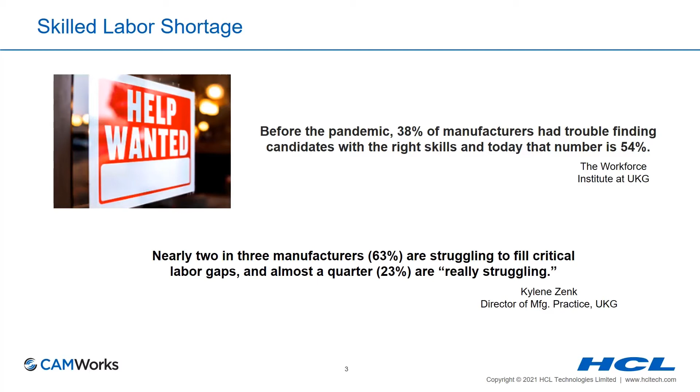For a number of reasons, many related to the pandemic, workers are resistant or at least slow to return to work. So how is this skilled labor gap shortage impacting the manufacturing industry? The short answer is severely.

For example, in the U.S., the economy is recovering and many manufacturing firms are seeing an increase in the number of orders. But due to the shortage in skilled labor, production is still down and companies are struggling to keep up with the increase in demand.

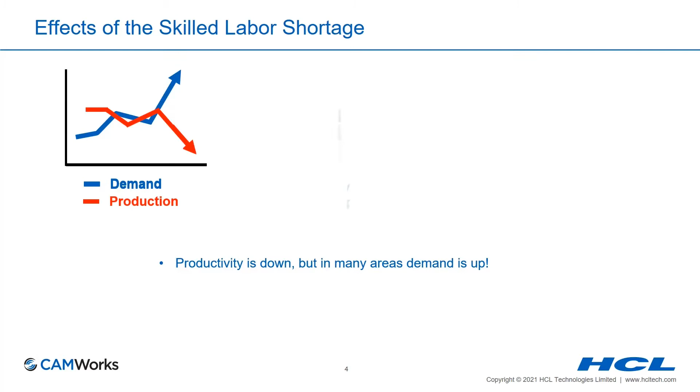In addition, the pandemic and skilled labor shortage has severely impacted the supply chain, and this has affected many manufacturers on both sides of the value stream. On one end, the raw materials and purchased goods manufacturers need to produce products are in short supply, and the supply chain disruptions are causing delays.

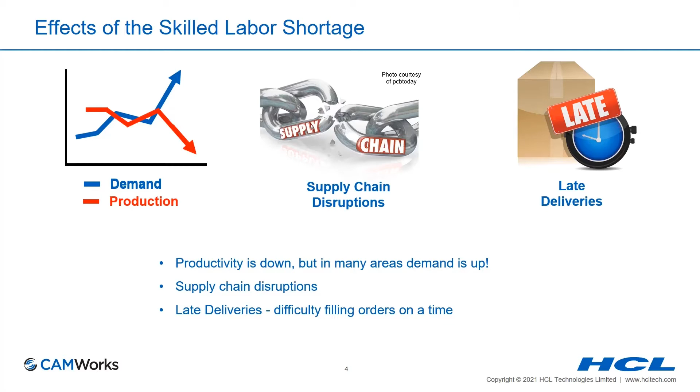While on the other end, if and when they are able to produce the products on time, the supply chain disruptions often still result in late deliveries. To make matters worse, the high demand and limited supply of workers means higher competition for those that are available. For many manufacturing firms, the skilled labor shortage combined with the supply chain disruptions are a double whammy, leaving them between a rock and a hard spot.

So what's the solution? How are manufacturing companies and suppliers coping with the new normal of both a shortage in skilled labor and supply chain disruptions? And why is it that some companies are thriving while many others are struggling?

First, consider the fact that businesses that were well along the road to digital enterprises were able to quickly adjust to working remotely, and as we come out of the pandemic, these companies are faring much better than those using more traditional business models. In short, the pandemic has helped manufacturing companies become keenly aware of the importance of digitally transforming their businesses.

The same can be said for smart manufacturing and Industry 4.0 automation. Manufacturing firms which had gone paperless and were already using smart manufacturing automation tools before the pandemic were in a much better position to minimize the impact on production and pivot to working remotely.

Going forward, it's clear smart manufacturing and Industry 4.0 can help companies to automate the design through manufacturing process, and by using these strategies, manufacturing firms can leverage their existing labor force to combat the shortage of skilled labor.

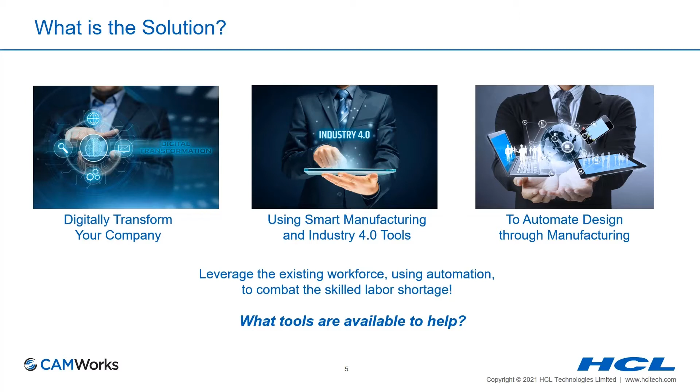So next, let's review some of the tools available to help manufacturers, both small and large, combat the skilled workforce shortage. To begin, fully integrated CAD/CAM is an ideal solution to help fill the skills gap.

When using SOLIDWORKS and CAMWorks, the CAD and CAM model become one and the same, and all of the CAD and CAM data is stored in a single file. There's no need to maintain separate CAD and CAM files, and no risk of machining an obsolete revision of the part. The toolpaths are fully associative to the design model and update automatically to design changes, saving you valuable time each time an engineering design change occurs.

Perhaps most importantly, once CAMWorks has been configured, engineers and designers who are skilled SOLIDWORKS users can also take on some of the CNC programming responsibilities in order to fill the skills gap.

Another automation tool SOLIDWORKS CAM and CAMWorks offers is feature-based machining. Similar to feature-based design using SOLIDWORKS, you can easily create parametric machinable features that are fully associative to the design model. The end result is an 80 to 90% reduction in programming time as opposed to traditional standalone CAM systems.

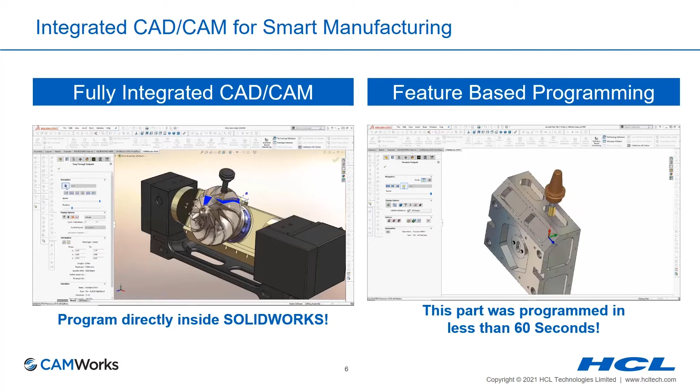All of the CAM data is fully compatible between SOLIDWORKS CAM and CAMWorks. This means engineers and designers currently using SOLIDWORKS already have a robust CAM system at their disposal to assist in creating CNC programs to help fill the skills gap.

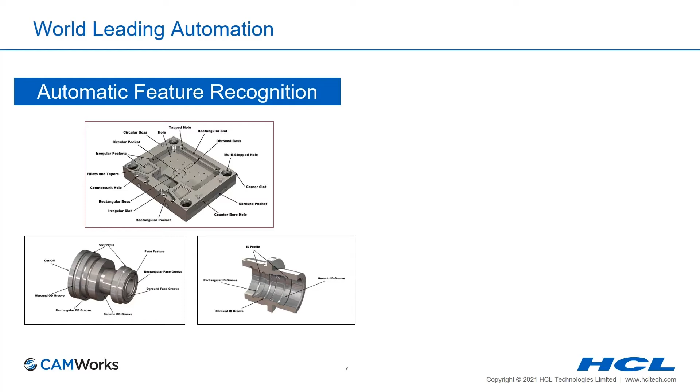From their inception, SOLIDWORKS CAM and CAMWorks included exceptional tools for automation. Using proprietary feature recognition technology, over 20 different types of machinable features can be recognized and added to the feature tree automatically. Another unique automation tool is knowledge-based machining, or KBM.

Using KBM, companies can capture the best practices of their best machinists and programmers into a company-owned database and reuse them automatically. Thanks to KBM, SOLIDWORKS CAM and CAMWorks enables companies to standardize their tooling and processes, create a library of machining strategies, and automate their CNC programming process.

Given the current shortage of skilled labor, these automation tools are more important than ever because they help companies empower their existing labor force to do much more in far less time. Using these smart manufacturing tools, CNC programs that took hours can be generated in minutes and even seconds through automation. And the programs generated are more consistent, promote standardization, and can be optimized to reduce costs and improve quality.

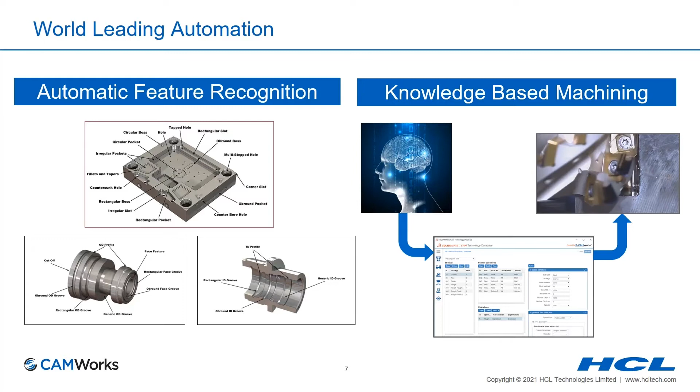To enable the use of digital twins for smart manufacturing and Industry 4.0, HCL developed a technology called tolerance-based machining, or TBM. TBM reads SOLIDWORKS MBD data and automatically selects the correct machining strategies to meet the tolerance and surface finish requirements.

GD&T, ISO 286, and surface finish symbols can all be used to automatically select machining strategies. This cutting-edge technology leverages digital manufacturing to automate the CNC programming process and optimize the machining process.

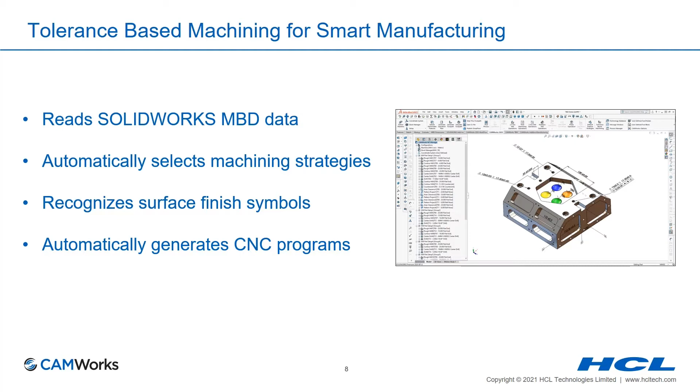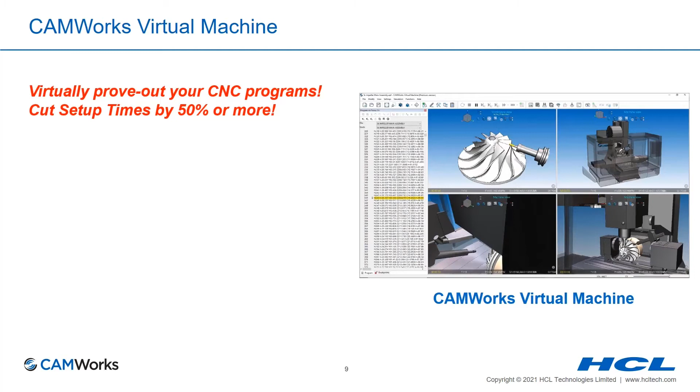Another great tool in our arsenal for combating the skilled worker shortage is CAMWorks Virtual Machine. CAMWorks Virtual Machine leverages true G-code machine simulation to help you virtually prove out your CNC programs and cut setup times by 50% or more.

CAMWorks Virtual Machine includes collision detection for machine components, work-holding devices, and tools to enable companies to avoid costly collisions, broken tools, and reduce downtime.

CAMWorks Virtual Machine is another ideal solution for combating the workforce shortage because it allows companies to prove out CNC programs remotely without using machine time. And shorter setup times, along with shorter cycle times, means shorter lead times and quicker deliveries.

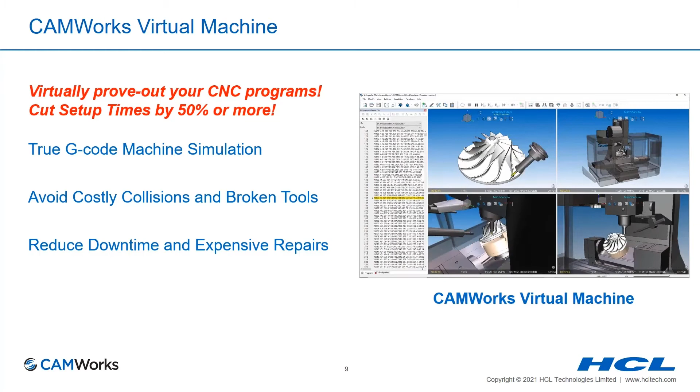Next, let's take a look at some of the smart manufacturing tools we've discussed in action.

Here's a part model designed using SOLIDWORKS. The intent is to machine the part from 6061 aluminum. This part will require 7 setups on a 3-axis CNC machine, or using a 5-axis CNC, this part could be machined in a single setup using indexing or 3+2 machining. Let's use the integrated SOLIDWORKS CAM by CAMWorks to program this part.

I'll begin by extracting the machinable features on the part model. SOLIDWORKS CAM can automatically recognize over 20 different types of machinable features and add them automatically to the feature tree. Here you can see all 7 setups have been created, and the features from each setup have been recognized and automatically placed under each setup in the SOLIDWORKS CAM feature tree.

Next, I'll generate the operation plan, and SOLIDWORKS CAM will automatically generate all of the operations required to machine the features using knowledge-based machining. All of the operations are now created and have been added to the SOLIDWORKS CAM operations tree. Next, we can generate the toolpaths for the operations, and all of the toolpaths are created automatically.

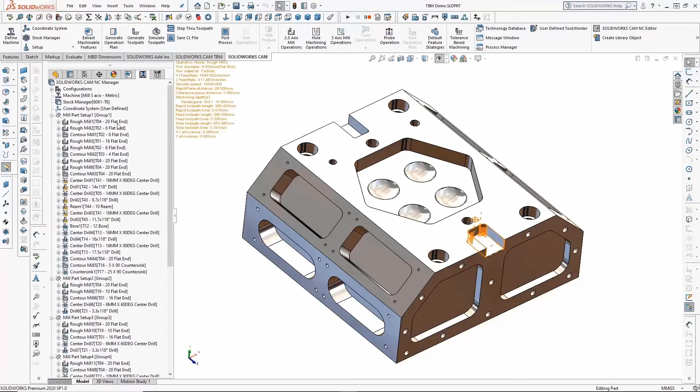Each operation can be opened and reviewed. Any desired changes can be made to the operation parameters and saved back to the database, so the next time the operation is generated, it will include any desired changes.

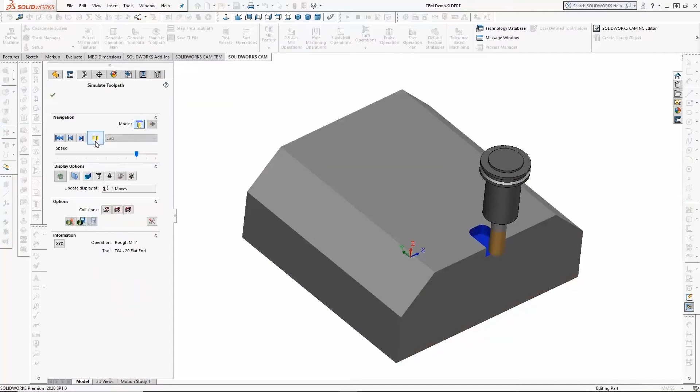Now that all the features and operations have been generated, we can use Toolpath Simulation to simulate the machining of the part. SOLIDWORKS CAM Simulation displays each of the operations that will occur on the CNC machine in the order listed on the operations tree and performs collision detection on the tool, tool holder, and stock.

Once the simulation is complete, I can use the Compare feature to compare the machined model to the design model for accuracy. I can see the part has been completely machined except for the surfaces in the center of the part, which will be programmed automatically later using tolerance-based machining.

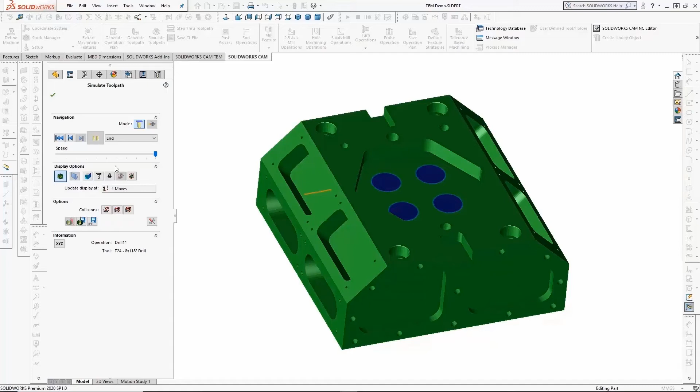Now that the part has been programmed, I can post-process the data and generate the G-code program required to machine the part on the CNC machine. I'll give the file a name and then generate the G-code for machining. Here you can see the G-code program being post-processed.

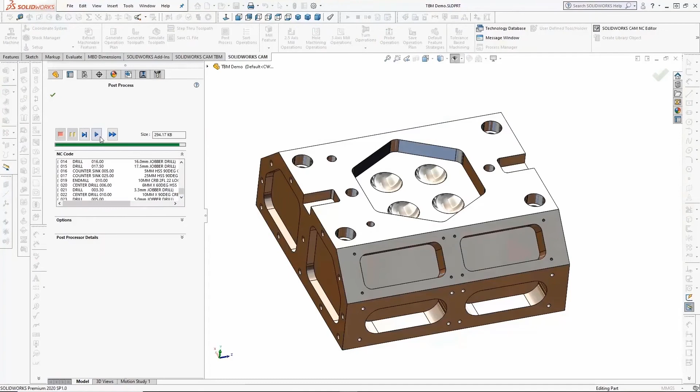Next, let's take a look at the tolerance-based machining, or TBM automation, included in every seat of SOLIDWORKS CAM. We'll begin by setting a tolerance range from 0 to 0.1 millimeters for hole features and select a precision machining strategy for the MBD tolerance range.

Using TBM, users can define multiple tolerance ranges for different types of features and select the machining strategies required to meet the tolerances specified by the MBD data.

On the Surface Finish tab, we can assign a color to each surface finish range, and the color will be assigned to each surface that falls within the specific range. We can also assign the correct machining strategy to meet the surface finish requirements when TBM recognizes each surface finish symbol.

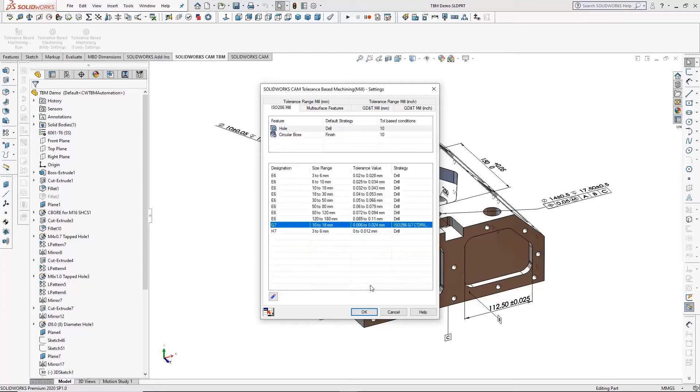Next, we'll use automatic feature recognition to extract the machinable features on the part, and TBM will read the MBD data and assign each of the colors and machining strategies we specified under the TBM settings.

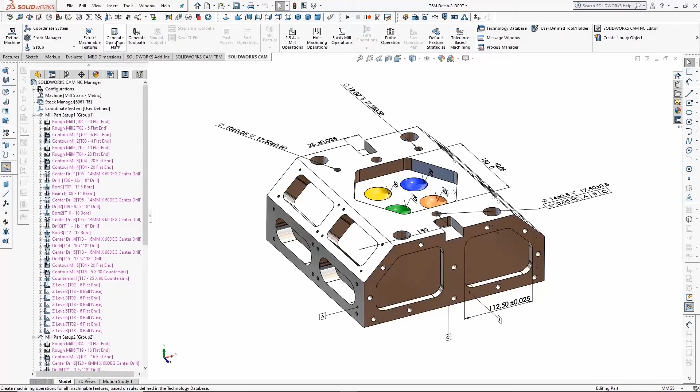Now we'll generate the operations for machining using knowledge-based machining, and thanks to TBM, the assigned strategies will create the operations required to meet the tolerances and surface finishes specified by the MBD data. Now that all the operations have been generated, we can generate the toolpaths for machining.

Once all the operations have been generated, we can use the integrated simulation to verify the toolpaths for machining. Here you can see the simulation of each of the surfaces being machined.

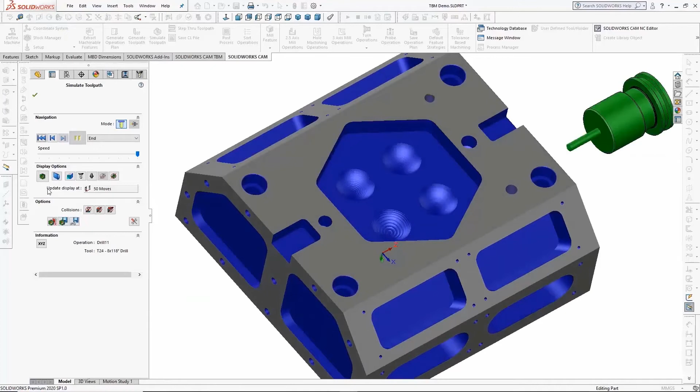And when the simulation is complete, we can use the compare feature to compare the machined model against the design model to see that everything is completely machined. Once we're happy with the machining process, we can generate the G-code for the CNC machine to machine the part.

I hope you're beginning to understand how MBD data and tolerance-based machining can help you reduce programming time and improve the quality of your parts.

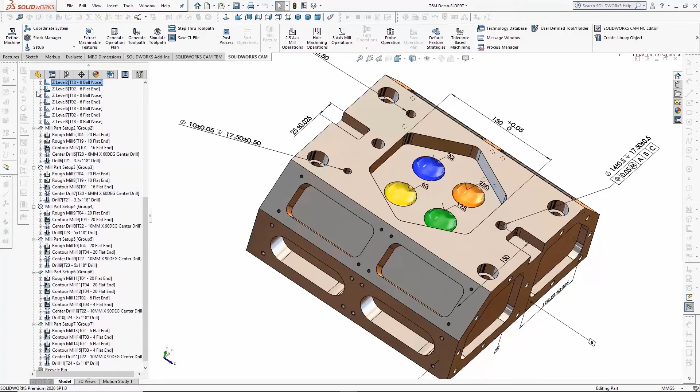And when you're ready to move to the next level, CAMWorks can be used to program even the most complex parts, including 3-axis molds and more. Here, using CAMWorks, a 3-axis mold for a PVC fitting is programmed in less than 5 minutes.

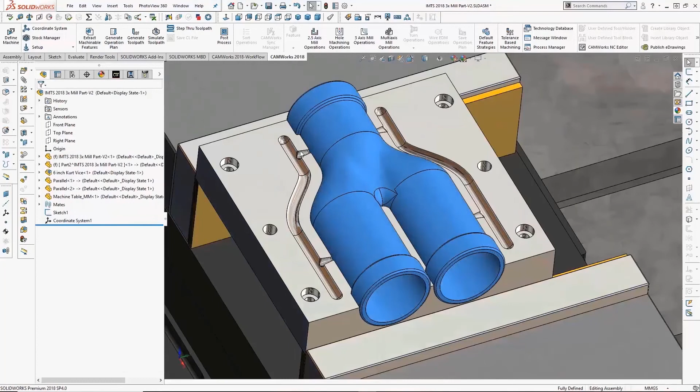And when a change to the inlet dimension of the part from 30 millimeters to 25 millimeters occurs, the mold updates automatically. Because the CAD and CAM files are one and the same, CAMWorks recognizes a change in the mold has occurred, and the fully associative toolpaths are automatically regenerated.

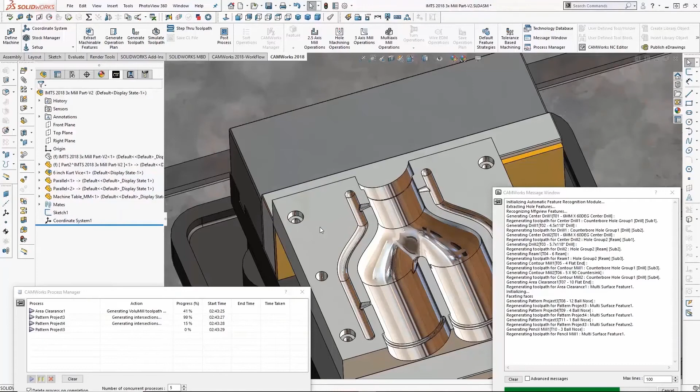Within seconds, the toolpaths are updated, and a new CNC program can be created for the new revision of the part.

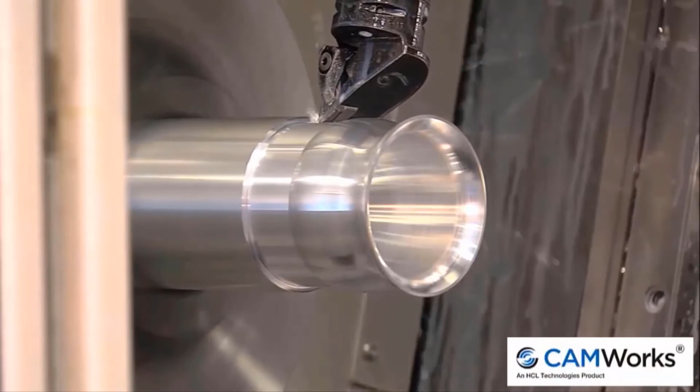Using CAMWorks, even the most complex parts on the most complex mill turn machines can be programmed easily. CAMWorks can take advantage of the full capabilities of your machine so you can get the most out of your investment.

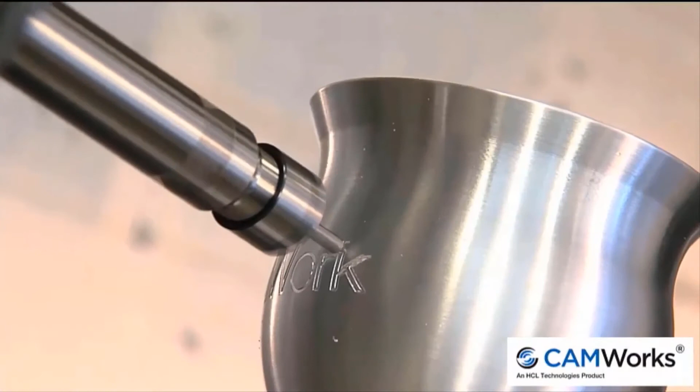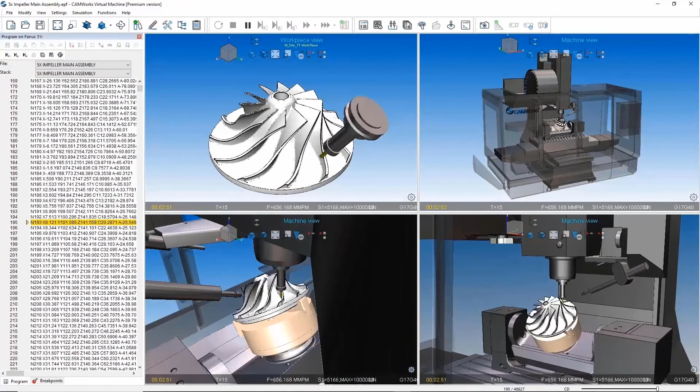Even the most complex 5-axis parts can be programmed using CAMWorks. Impellers, blisks, ports on cylinder heads, and more can all be programmed. And using CAMWorks Virtual Machine, you can leverage true G-code simulation to prove out your programs and reduce setup time.

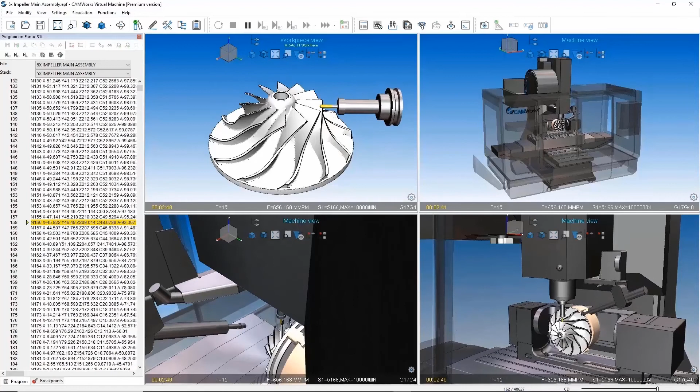And perhaps most importantly, during this time of crisis with COVID-19, SOLIDWORKS, CAMWorks, and CAMWorks Virtual Machine enable the designer, CNC programmer, and CNC machinist to all work remotely and seamlessly so production can continue.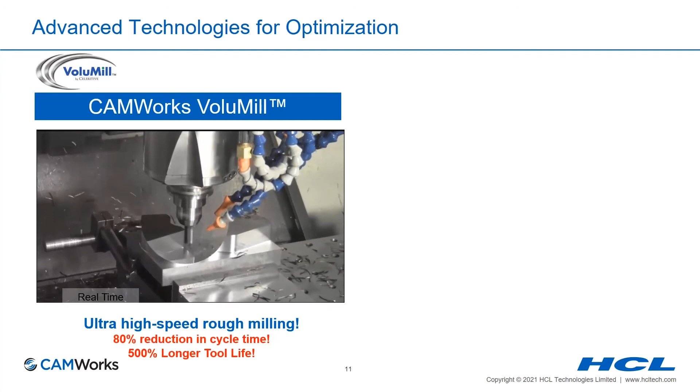Now that we've reviewed some of the tools available for automation, let's discuss some of the smart manufacturing tools available for optimization. CAMWorks VoluMill is an ultra-high-speed rough milling technology to help reduce cycle times by 80% or more and increase tool life by as much as 500%. As a result, using VoluMill, companies can increase production by as much as 400% using their existing machines and machinists.

In a similar way, prime turning by Sandvik has now been added to CAMWorks to allow for a 2 to 3 times increase in feeds and speeds for turning, while at the same time providing a 500% increase in insert life.

Optimization technologies like VoluMill and prime turning are a great way to combat the workforce shortage. Companies often see a 2 to 4 times increase in production using their existing machinery and personnel. And greatly reduced cycle times means parts can be machined far more quickly, making it easier to ship earlier and supply on-time deliveries even with supply line disruptions.

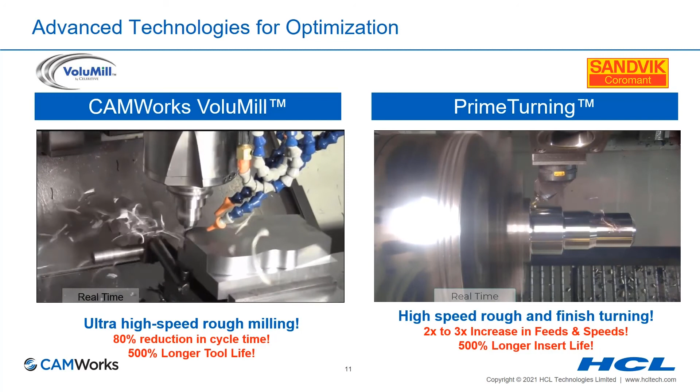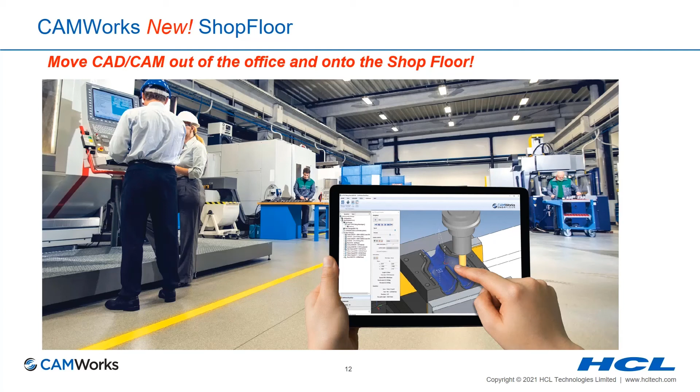Now that we've looked at some of the tools for automation, verification, and optimization, let's look at a new tool created to improve communication. CAMWorks' new shop floor is a digital communication tool specially designed for paperless manufacturing. CAMWorks Shop Floor is an easy-to-use app for use on the shop floor by CNC machinists and operators to move CAD/CAM out of the office and onto the shop floor for a fraction of the price of a full CAD/CAM system. Let's watch a short video to learn more.

CAMWorks Shop Floor is a new, affordable, smart manufacturing product designed specifically for use on the shop floor. All of the CAD and CAM data necessary to manufacture a part can be provided to the shop floor in a single digital file. Out on the shop floor, a CNC machinist or inspector can open the file, and CAMWorks Shop Floor provides a robust set of tools to view, measure, and section solid models.

All of the CAM data, along with digital setup sheets, tool list, and the G-code program, can be displayed to assist in the setup of the CNC machine. The CNC program can be simulated using state-of-the-art Toolpaths simulation and step-through simulation to allow the user to review each move of the CNC program.

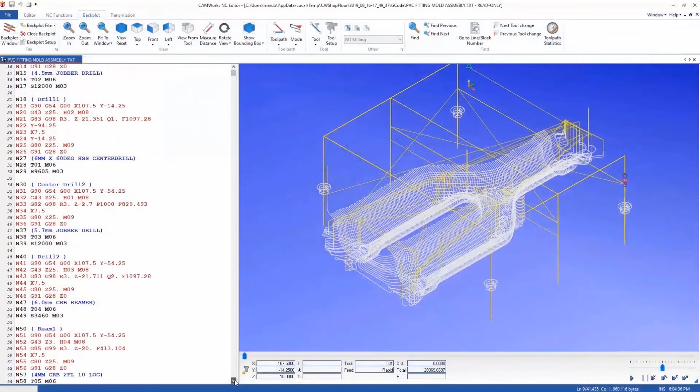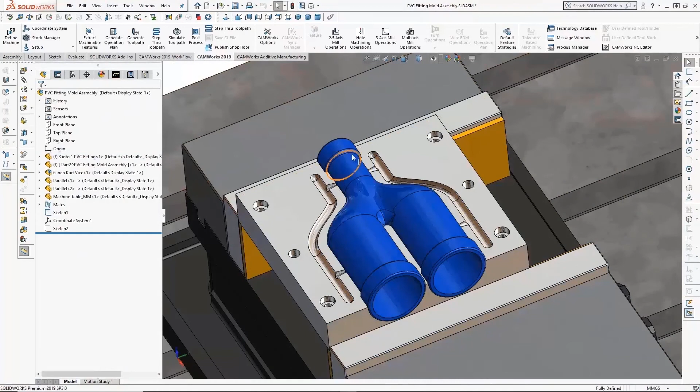An NC editor powered by CIMCO is also included to allow the machinist to review the CNC program, backplot directly from the G-code, make any final changes, and send the program to the CNC machine. CAMWorks Shop Floor provides file tracking capabilities to warn the user if a change to either the CAD or CAM data has occurred to avoid an outdated revision of the part from being manufactured on the shop floor.

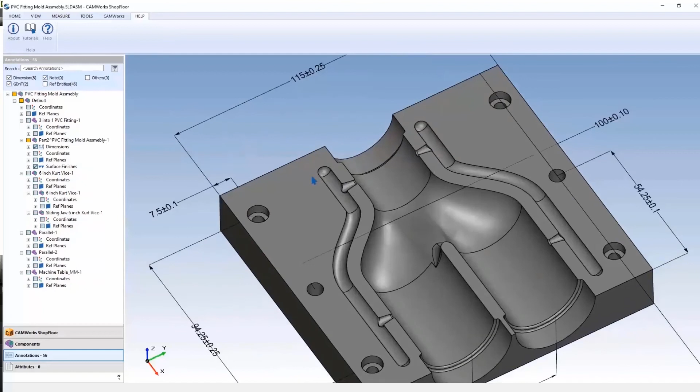The ability to display, search, and filter MBD and PMI dimensions and data is included to allow the use of fully dimensioned solid models, eliminating the need for 2D drawings when you're ready to take your company to the next level. Never before has such a powerful set of smart manufacturing and Industry 4.0 tools been available on the shop floor, and the ability to publish shop floor files will be available to all SOLIDWORKS CAM and CAMWorks users.

Using CAMWorks Shop Floor, you can reduce setup times, avoid costly collisions, improve quality, increase production, cut your delivery time, and take CAD/CAM out onto the shop floor for a fraction of the cost of a full CAD/CAM system. Bring your shop into the 21st century with CAMWorks Shop Floor.

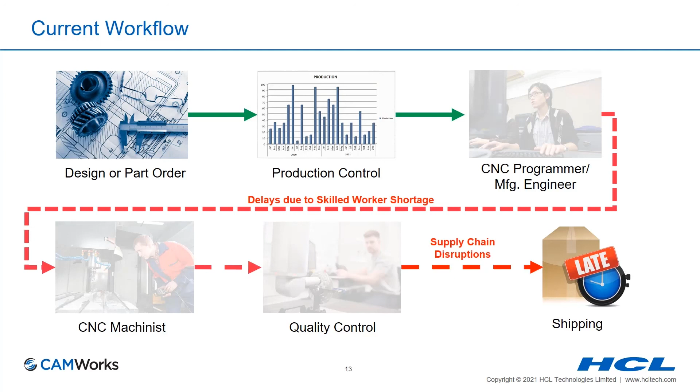So if your current workflow is being disrupted by skilled workforce shortages, or you're experiencing supply chain disruptions that are making it difficult for you to meet production demands and make on-time deliveries, consider how the tools we've discussed can help you improve your workflow. By leveraging the latest automation, optimization, verification, and communication tools, you can come out a winner in the battle against the workforce shortages and supply chain disruptions that have become the new normal.

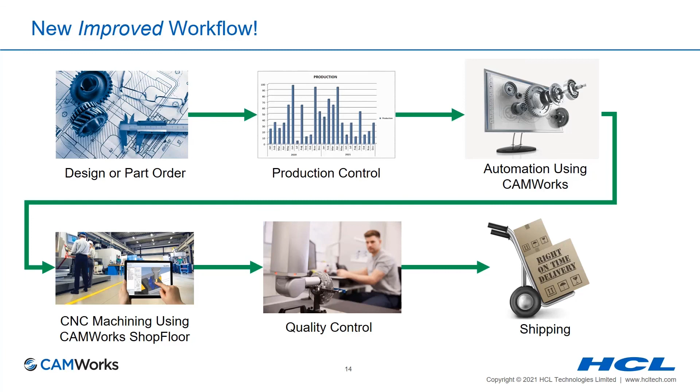Leveraging the latest technology, you can reskill your workers and get the most out of the employees you have available. Using smart manufacturing, you can fill the skilled workers gap and significantly increase your production with your existing workforce and machinery. These cutting-edge tools can help you accelerate your time to market and digitally transform your workflow so you can increase production, reduce costs, improve quality, and make on-time deliveries.

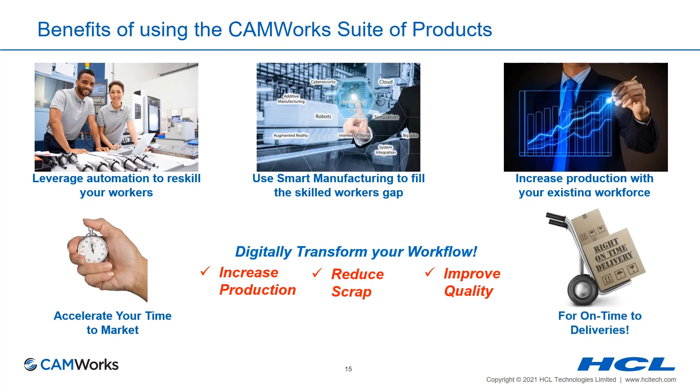The well-known businesswoman and Shark Tank TV star Barbara Corcoran once said, 'Procrastination is the enemy of success.' So consider this a call to action. There are those things which are out of our control, but if we expect to succeed, we need to have the courage to change the things we can. So I would encourage those listening not to continue to procrastinate, and instead use this webinar as an opportunity to take action and invest in the technologies that will help you combat the workforce shortages and supply chain disruptions and determine the industry leaders of tomorrow.